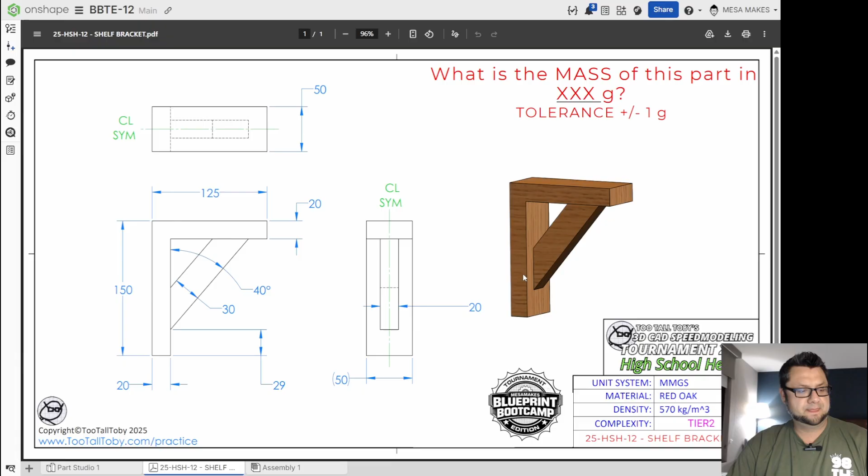So for this one we're going to be doing a shelf bracket. If we jump into our drawing, you'll see today we're going to be making this out of wood, and it's not a completely realistic part in that our piece right here would actually be about two pieces if we were doing this out of real wood, but you get the idea. So we're going to draw our shape.

Everything is going to be in millimeters. We are going to use red oak as our material, and it is a tier 2 shelf bracket, and we need to find our mass. So what is our mass of this part in XXX grams with a tolerance of plus or minus 1 gram?

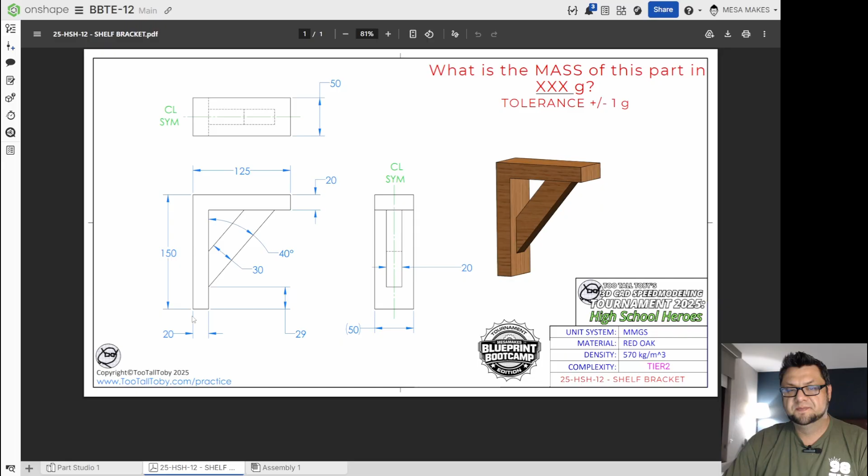I think I'm going to draw this 150 by 125, and I'm going to draw an offset of 20 millimeters. Then I'm going to come in and draw this cross member and take care of that. But a cool trick you can use here is doing the 150 by 125 and making it a thin feature instead of trying to extrude the shape and adding more lines. Kind of whatever you think would work best for you, but that's how we're going to do it.

So let's go ahead and jump on over to Onshape and get started.

Once we jump into Onshape, the first thing we want to do is change our units to millimeters and grams. We'll come up here to the top, go to workspace units, change inches to millimeters, pounds to grams, click our green check mark, and we will get going.

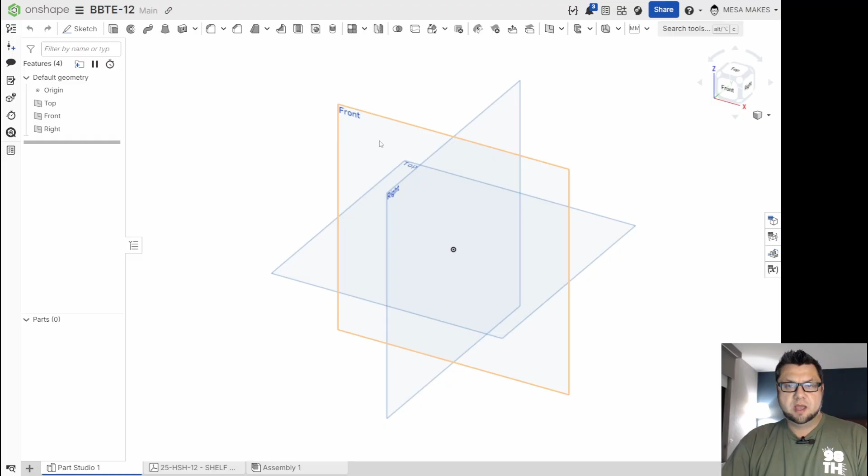I'm going to start on the front plane. Hold down Shift and S, start a sketch, N to normalize, and P to hide those planes. Like I said, I'm going to draw that 150 by 125. I'll come up, 150, enter. You can press F and that'll fit your drawing too, another little quick trick.

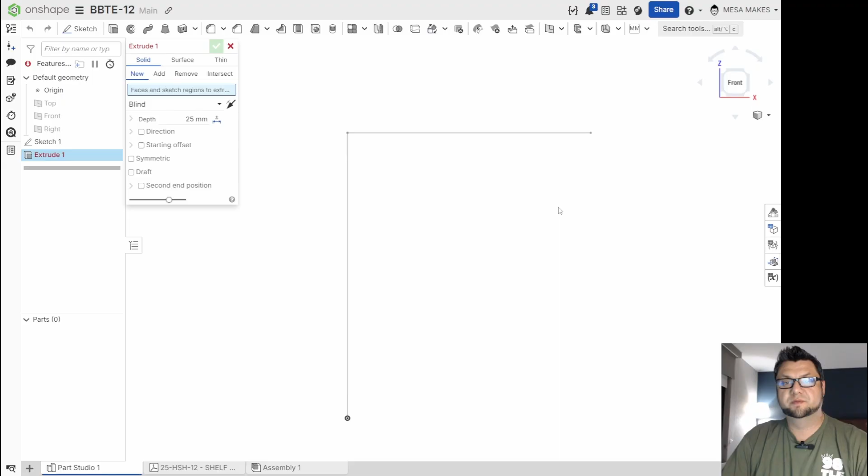I'll come over 125, and at this point I'm just going to extrude by doing Shift and E. I'm going to do a thin feature, select both lines, and give it that thickness of 20. If I look over at my drawing, my depth needs to be 50, and I'm going to tell it symmetrical so I can use that plane still to draw some stuff, and we'll go from there. So I'll say OK.

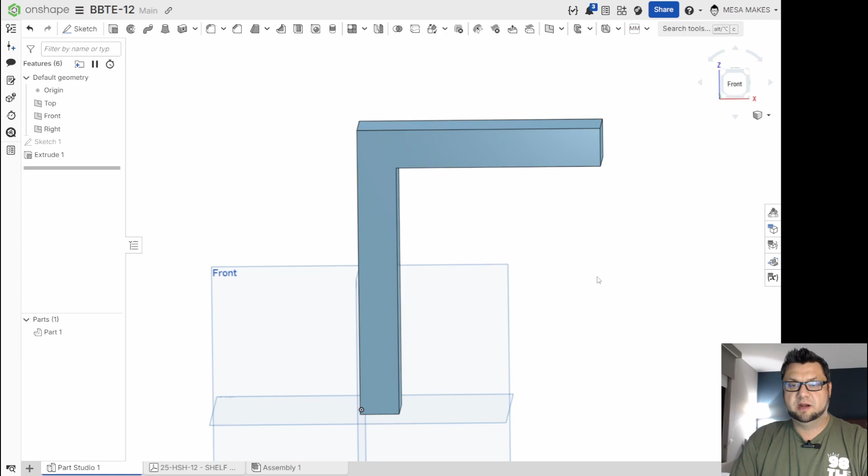At this point, I want to turn my planes back on, click my front plane again, click Shift and S, and I will normalize those planes. What I'm going to do now is draw from here kind of up to here. I'm going to tell that point and that point to coincide, that point coincide with that line.

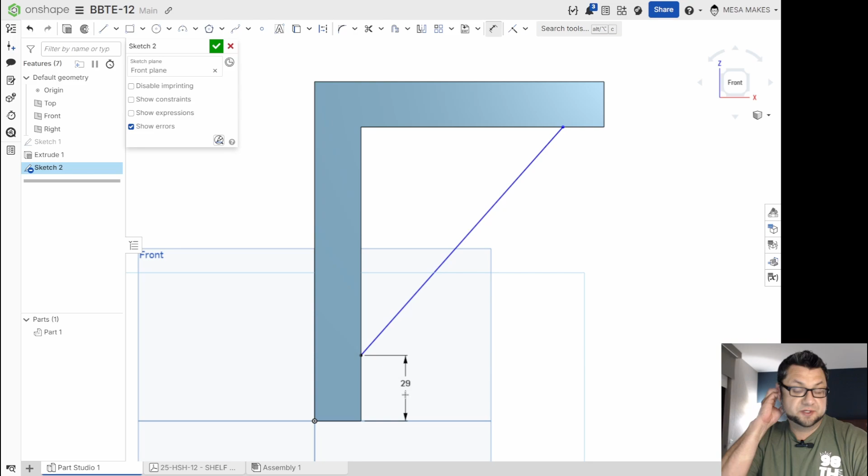I know that from here to here needs to be a dimension of 29 millimeters, and I need to offset, or actually I'll give it that dimension of 40 degrees from here, so we'll say 40. Now next I will offset from this the opposite direction, a total of 30 millimeters.

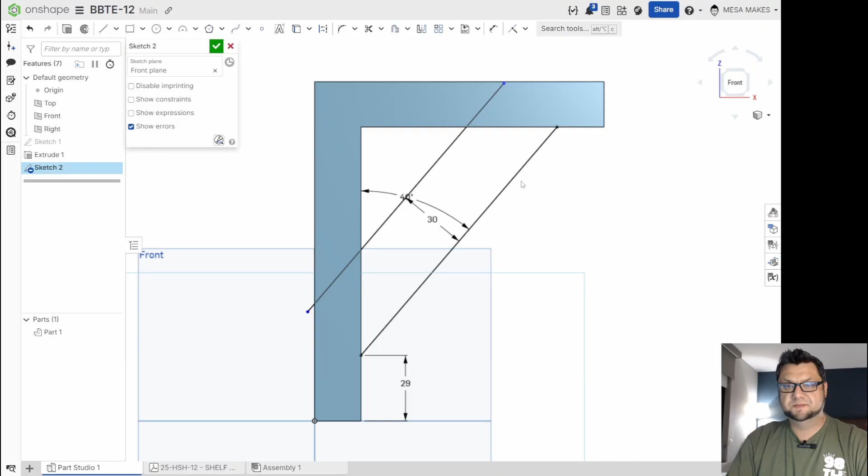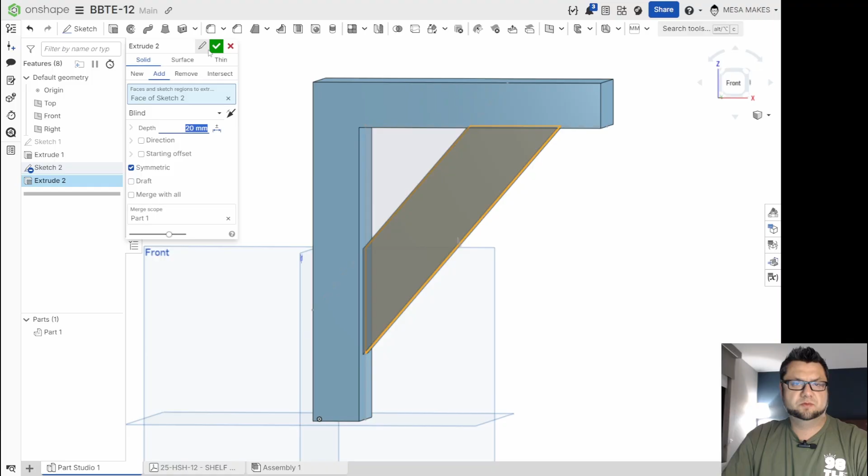At this point most of you guys probably want to trim this thing up, but I'm going to just click these two lines and say use. Again we'll do Shift and E, but this time I'm only going to pick this center portion, and instead of doing a thin, I'm going to do a solid feature. I'm going to add it symmetrical, and that one needs to be a total of 20 millimeters. We'll say OK, and we have our shape drawn.

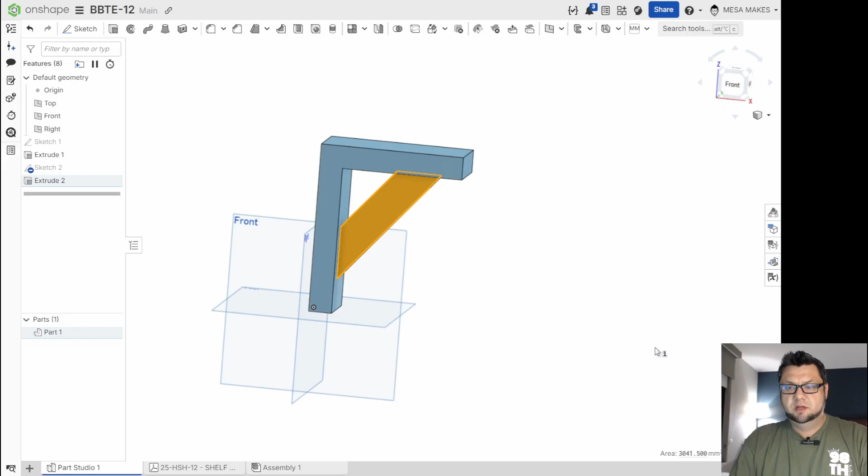Once we have our shape drawn, we need to go ahead and add the material. If we right click and click assign material for part 1, change it to our TTT custom materials, check our print, and we do need to make this out of red oak. We'll scroll down, red oak, accept, and come over into my weight, and I have 180.023 as my answer.

The correct answer is 180 grams with a tolerance of plus or minus 1 gram. So I can be as low as 179 and as high as 181. Anywhere within that range is going to be good.

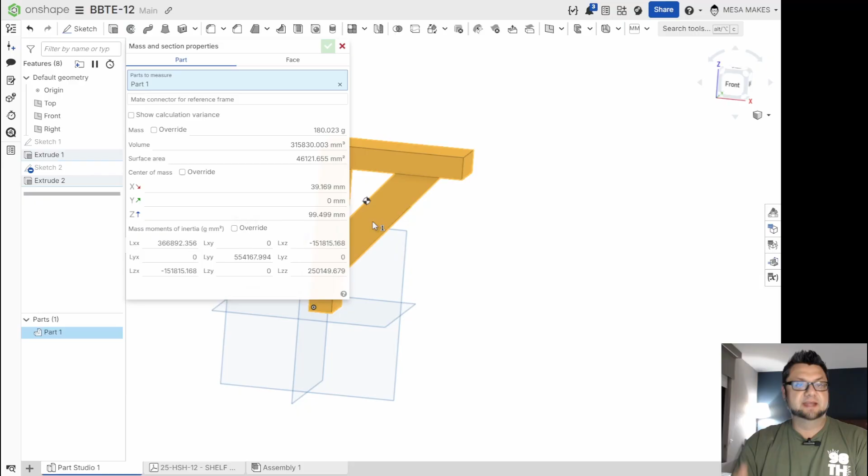So that's going to pretty much do it for us. I know that's a different kind of way of doing things, that thin feature, but it's a lot quicker to get this drawing made. If you do this with this mentality, I like it because your feature tree has your shape in your sketch - your first extrude is the thickness of that one part, then your next sketch handles that crossbar. So if you needed to change anything, it's set up in a way to future proof some things.